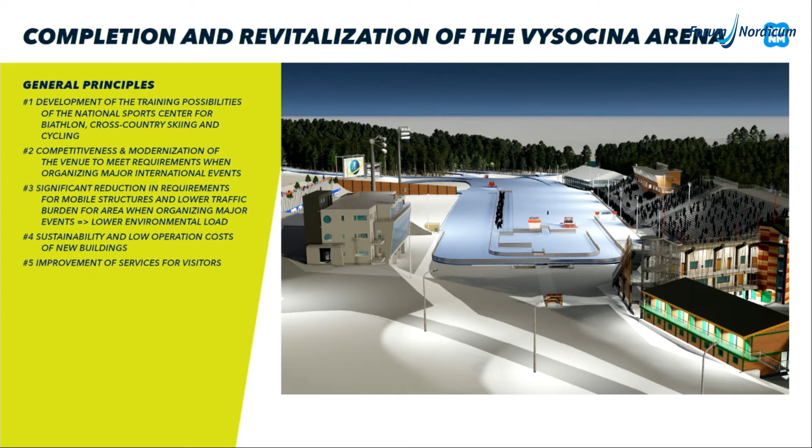And of course, because we have this sustainability topic, which is quite hot also in Czech Republic and on the international sports scene, the goal is also to replace many of the mobile structures we've used in previous events, which basically meant tens and tens of trucks bringing in equipment and then bringing it out. So we hope to reduce this at least by 50%. And also we built the new buildings so that they are really low on energy requirements, and they are basically nature friendly. So we used a lot of wooden materials and materials close to nature.

And in general also the venue should be now more friendly to the visitors, not only at the events but also out of the events, because we have tens of thousands of visitors coming to Vysočina Arena all year long, either for cross-country skiing or for mountain biking, running, jogging. So basically the venue lives, let's say, almost 365 days a year. We have also periods of bad weather, but when the weather is good, there are really thousands of people coming in to do their sports.

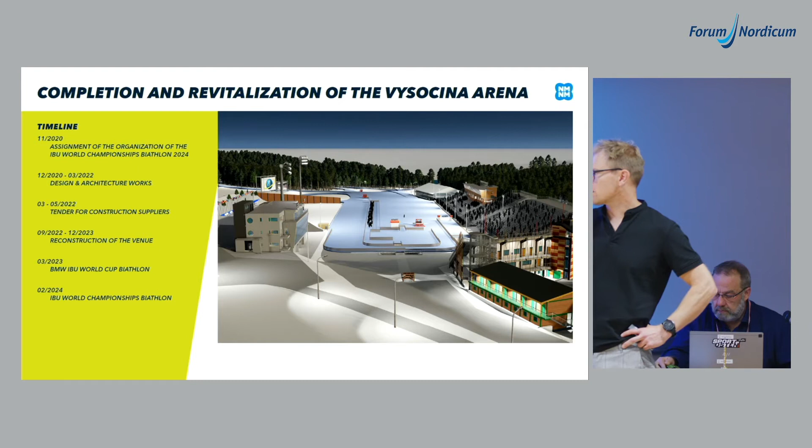The timeline, just to get back to where we started: in November 2020, we were assigned the organization of the IBU World Championships Biathlon 2024. And from then on, we've started to work on the design and architecture, and also on construction permits, which finally we closed down this February, and then we could start the tender process for construction suppliers. That's really important for us because all the money is funded by the government, either regional or national, and then we have really strict measures of how we can proceed with the construction and how we do the tenders, so that everything is legal and we don't run into any traps.

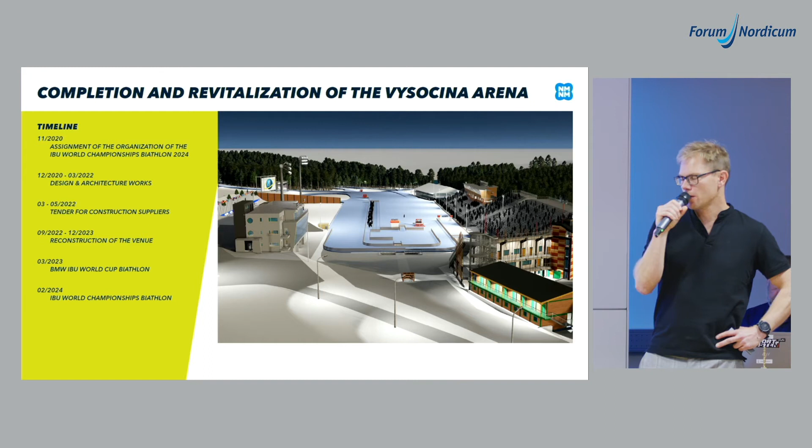The reconstruction of the venue started this September. We will run it in 2 phases because in March we have the Biathlon IBU World Cup, our test event for the World Championships. So that means that we need to stop some structures for that event, and also to secure the winter season, and then we will continue from April till end of the year 2023, where everything should be finished and the venue should be getting ready for the IBU World Championships, which we host from February 6th. That's the day when the event starts, and it's till February 18th.

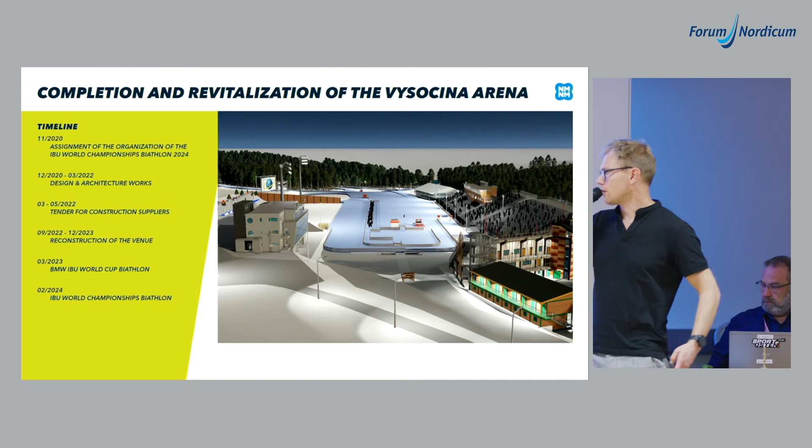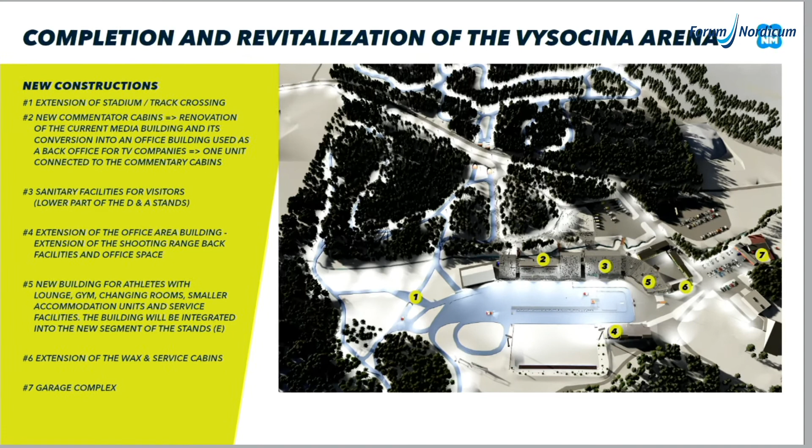These are the main new structures around which the renovation is built. So for us, logistically, the key point is the extension of the stadium, and that connects also to the new course crossing, which we move some 50 meters out of the stadium, and it will enable us to extend the surface of the stadium, because we ran into some narrow areas there, especially on the run out of the stadium. So now it will be all leveled, and hopefully will provide for better competitions and also better event logistics.

We will also renovate, and that should be of interest for you, the media building, which is quite old now, about 15 years, and that will also mean an improvement to media logistics, because the commentary cabins will be put right on the top of the roof of the media building, so all the media will be in one space.

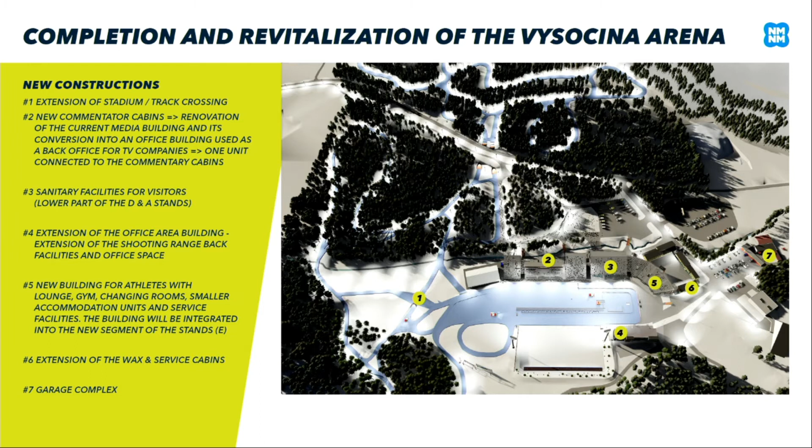And before that, when we had the commentator cabins on top of the D stands, we had a lot of issues with commentators being late for the mix zone, because they had to go through all the spectators, and it was never easy to guarantee direct access.

We will also add some offices to the already existing office area building, where we have background facilities and basically facilities for organizers. And the key building of this whole plan is the new athletes facility, which will be a huge building which will accommodate family club, service cabins, wax cabins. It will also have accommodation facilities on top.

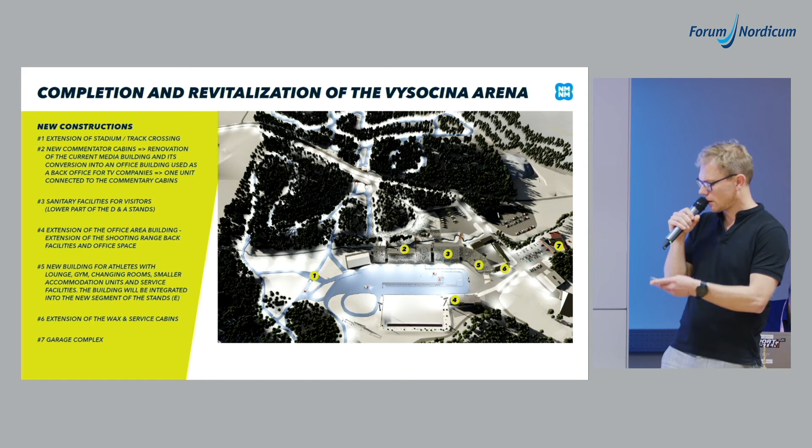There will be a gym inside with a weight room, so that athletes have really good conditions throughout the event, and they don't have to stay in these temporary cabins which we used to build till now. And of course we will also extend the service and wax cabin areas, and also the garage complex where we keep our grooming machines and all the technology, which also needs to be renovated, because it's quite outdated. So looking in detail into individual parts of the renovation.

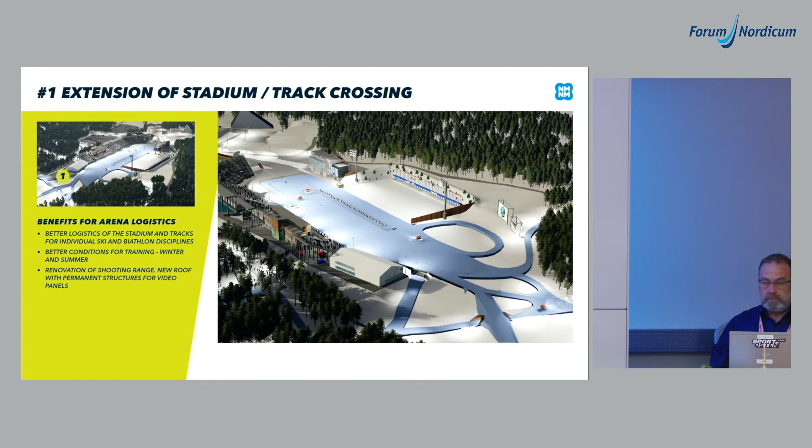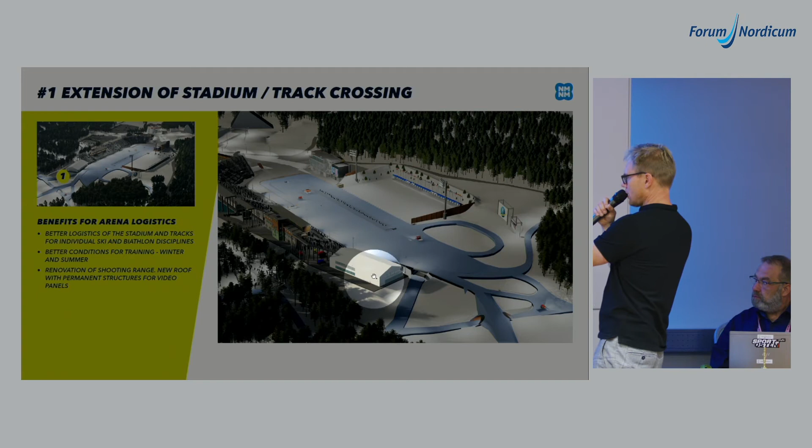As you can see, is there a pointer? Oh, yes. This is where the old bridge and the old crossing was. So that will be closed down, and the whole area will be leveled to extend the stadium. And the new course crossing will be built here with the tunnel.

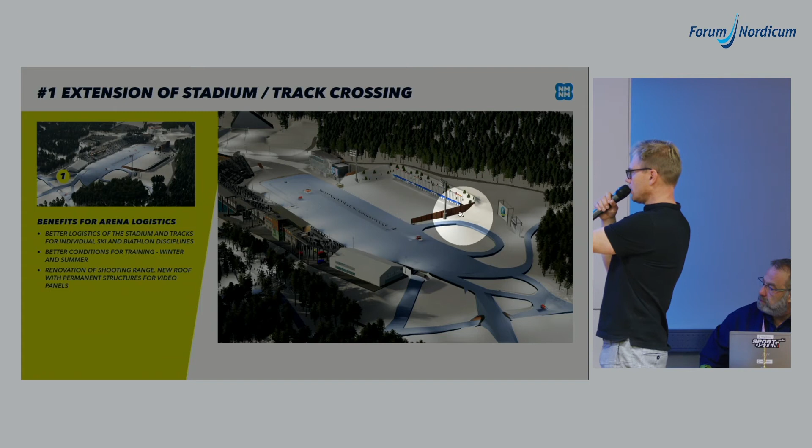We will also renovate the shooting range so that it can accommodate the LED walls, which are now a standard for biathlon events, so that the spectators can always see which athlete shoots at which target. It makes it really good for spectators, and we are really happy that this technology has become a standard now. And we'll be glad that our venue will be up to date with this.

And also what is important about these changes regarding training is that now we will be able to have the same courses for winter and summer training. So there will be no different course design for summer and winter.

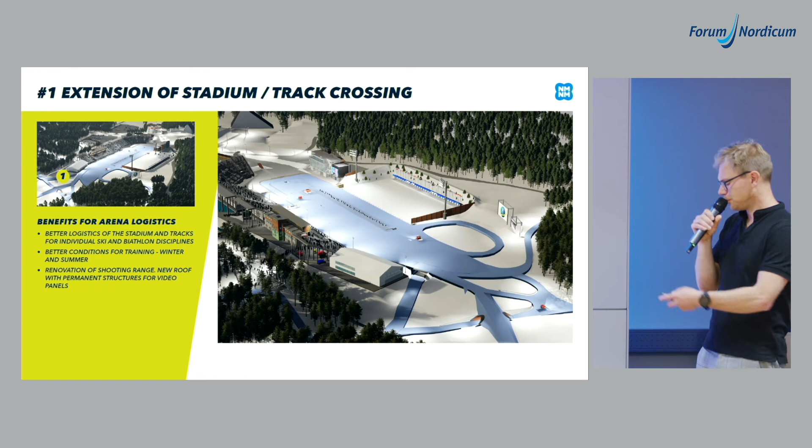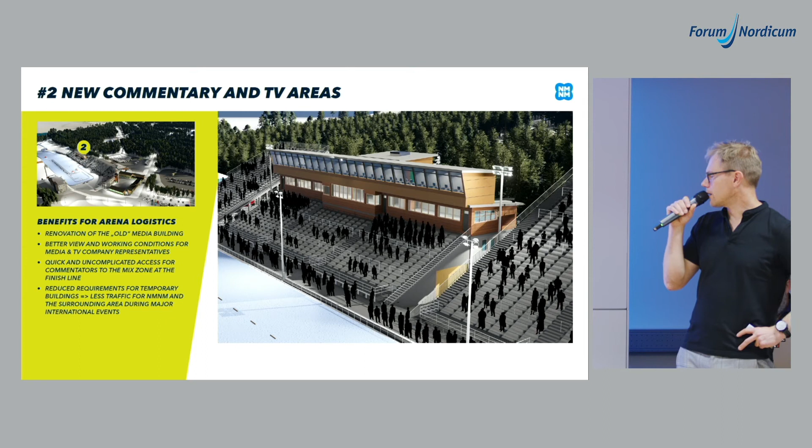For us, it really makes sense now that we will have all media inside one building, and we will not have to be moving them around. And we believe you and your commentator friends will also appreciate this. Of course, what's also good about these commentator cabins is that you now have a really central view of the shooting range, and there will be no one standing in your view.

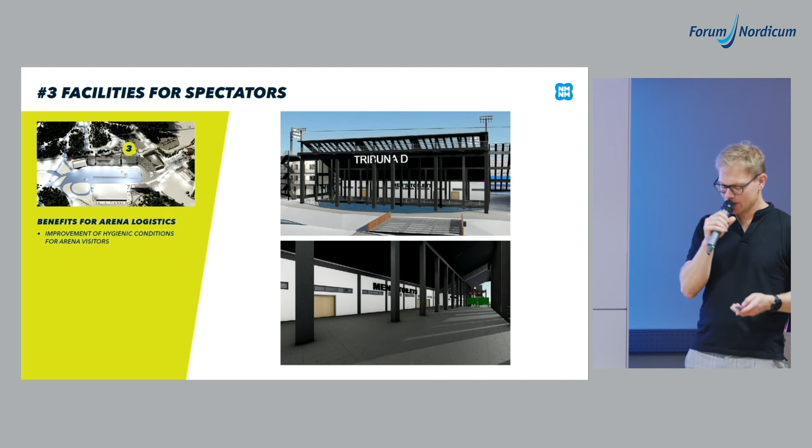Of course, we also think about the visitors and spectators. We used to have hundreds of mobile toilets, which we hope to replace now with more modern standard toilets all year long. So this is also an important step towards higher sanitary standards of the venue.

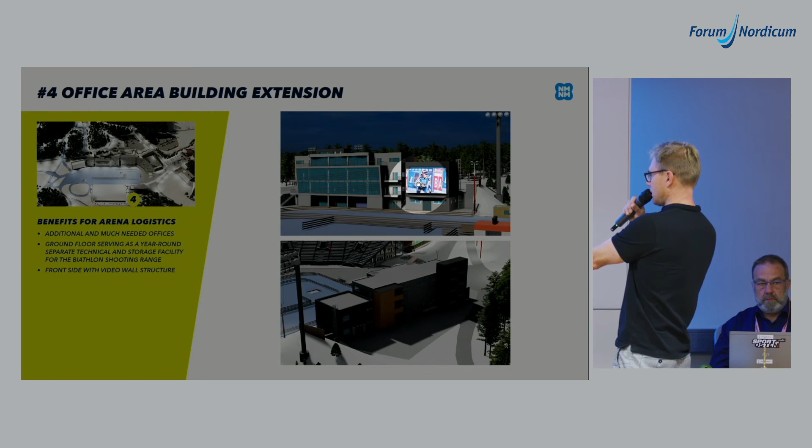On the top 2 floors, we will have the offices, and at the bottom, we will have a technical room for the shooting range, so that they don't have to transport the mats and all the extra equipment they need for the service in and out. So for our shooting range chief, that's very good news.

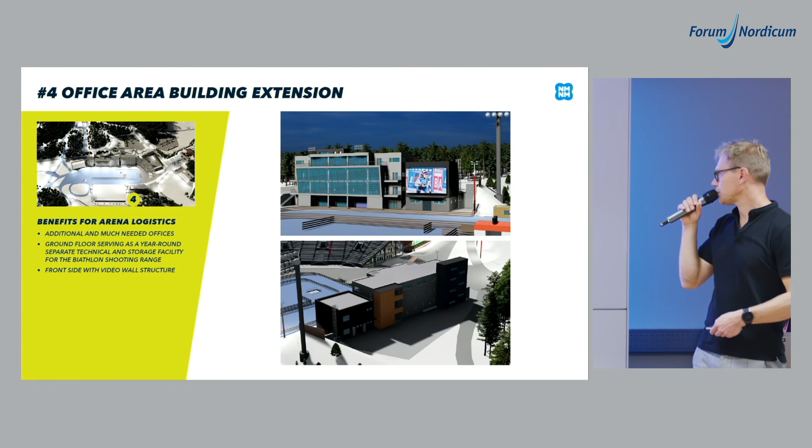And on the front side of the building, we will have a structure for an LED wall. So the building will also be used as a support for a huge LED wall during the major events. Yeah, this is the key building and a key element of the new reconstruction. This is the team facility building.

As I've already told you, it will accommodate the family club. It will be a meeting area for all the athletes coming in, coaches, servicemen. On the ground floor, we will have wax and service cabins. The middle floor, these will be the 2 large meeting rooms, which will also serve as gym and weight rooms.

And on the top floor, we will have accommodation, which will also be used as changing rooms during major events, or accommodation facilities for athletes when they come for training camps, etc. This is really a huge help for us, because if you can remember, we've always had these huge grandstands which we had to build from scaffolding.

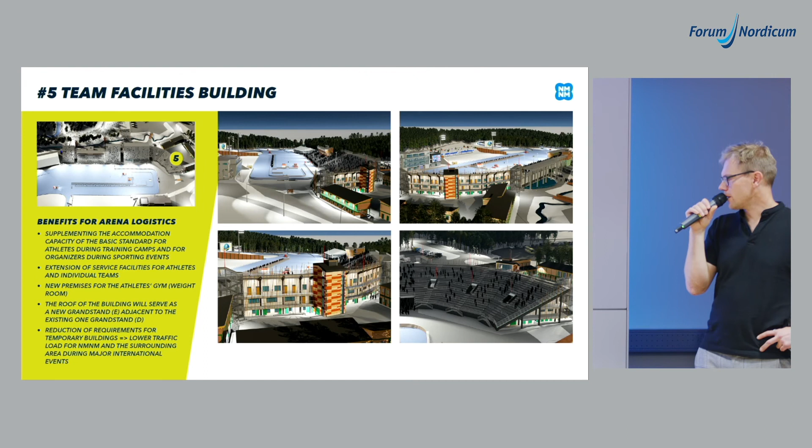It took us about 2 months to construct this structure, and then another 3 weeks to take it down. So it meant a lot of trucks coming in just for a few days, especially at the World Cups. And we hope now that this building will take it all together, because we also had to have cabins which we basically connected together to make one big family club, and it wasn't so practical, and it really was not so good for the people of Nové Město, because they had really huge traffic around the events.

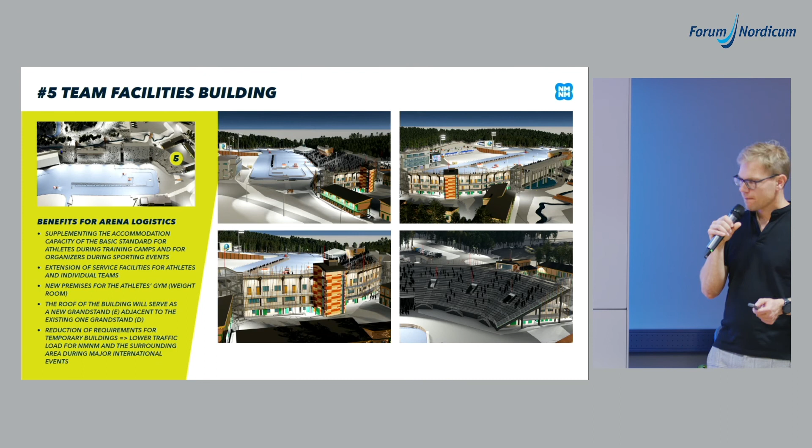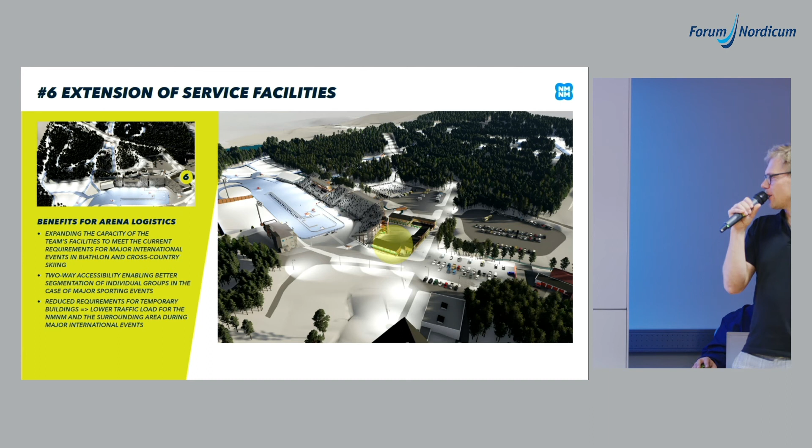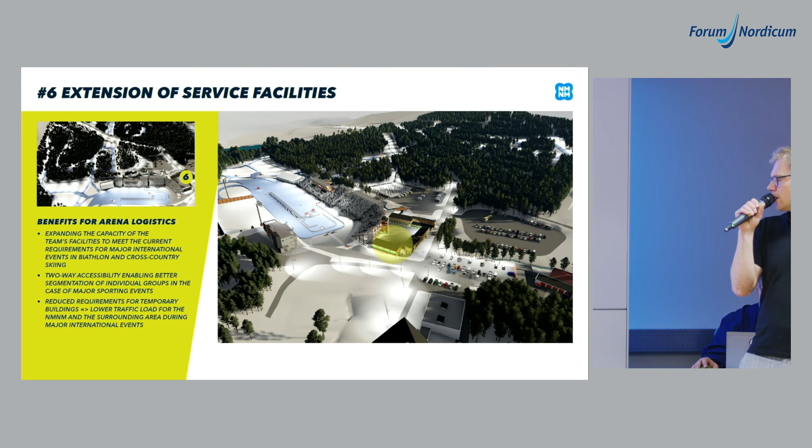Yeah, that is also connected to the reconstruction and extension of service facilities. So we will add 2 extra segments of wax and service cabins, because so far we had many but not enough. And we also think about the logistics. So the service cabins for the partners will face a different direction than the wax cabins for the teams. So logistically it should work during the major events.

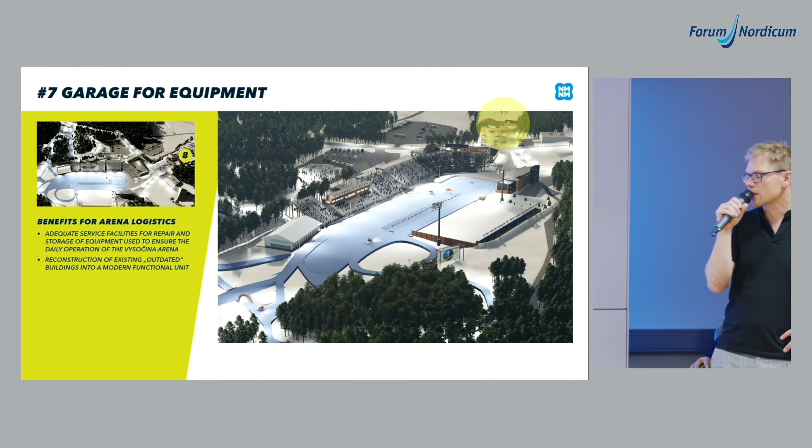Yeah, the last thing, which is more or less important for us: no matter the size of the Vysočina Arena venue, we still struggle with back facilities, and this should help us to have proper buildings where we can repair our technology, which we can use for storing snow guns, storing grooming machines, and everything that is needed to secure basically all-year-long operation of the venue.

Apart from building extra facilities, we will also renovate the stadium and track lighting. We will replace it with modern LED technology, because the current lighting is over 10 years old, so it has high demands for energy. So this new LED technology should also help us to conserve a lot of energy.

And we will also renovate the optical and data network, because many more TV companies want to send TV pictures via data. So we will also have direct IP camera plugins at intermediate points, and all the infrastructure that belongs to the 21st century. Yeah, and hand in hand goes the renovation of the power supply network.

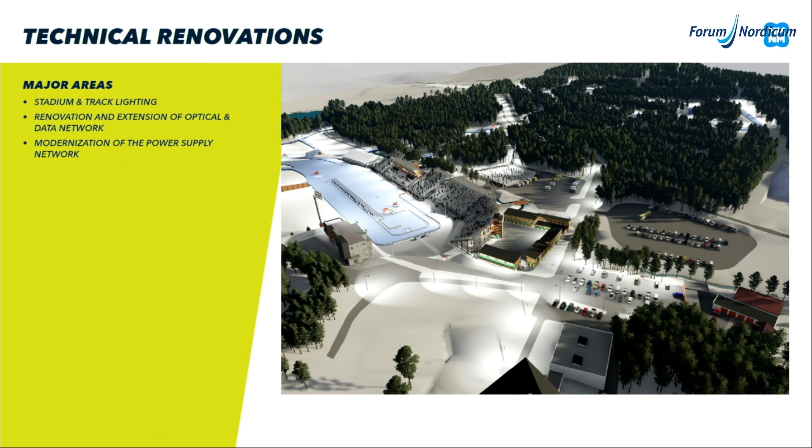And we are now working on a technology that will allow us to have direct venue backup all year long. So we will not have to transport diesel technologies in and out. We will have them permanently installed, and we will have basically the whole venue backed up 24/7. That's all from my side.

Does anyone have any questions regarding what was mentioned in the presentation? No, that's good. So I can hand the floor over to Thorsten. Thank you. Thank you, Jens. Thank you for your presentation.